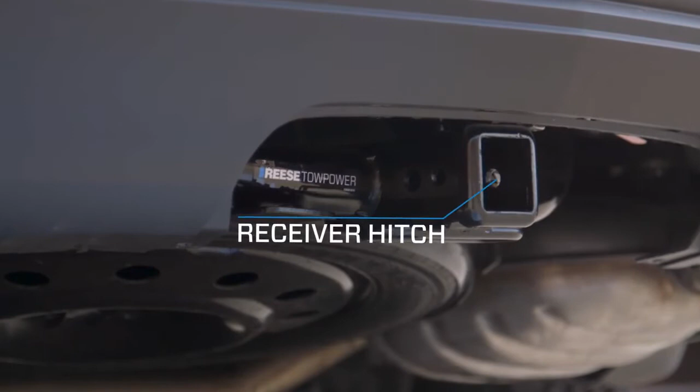The most important piece of equipment when wanting to tow a trailer or cargo product is a vehicle's receiver hitch. A receiver hitch, also known in North America as a trailer hitch, is a device attached to the vehicle's frame for towing that receives removable ball mounts, hitch bike racks, cargo carriers, or other hitch-mounted accessories.

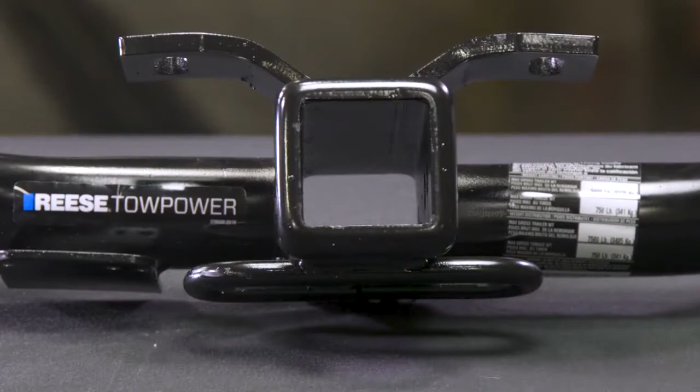They are custom built according to the vehicle manufacturer's model year to ensure perfect fit, appearance, and top towing performance. Today we are going to show you the basic steps to installing a REESE Towpower custom-built trailer hitch.

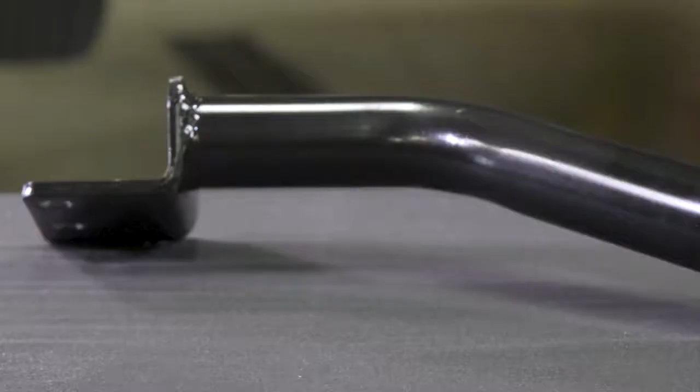Each custom-built REESE Towpower hitch is built for maximum strength and safety, using solid all-welded construction, and features a design that fits around the vehicle's underbody components that often minimizes or eliminates the need for drilling or trimming of bumper fascia.

Before installing, determine what class hitch and weight capacities best fit your towing and cargo carrying needs. For more information or for help selecting the correct hitch for your vehicle and towing setup, visit reesebrands.com.

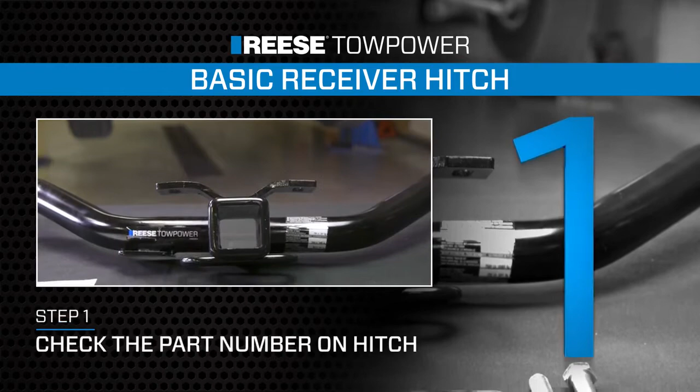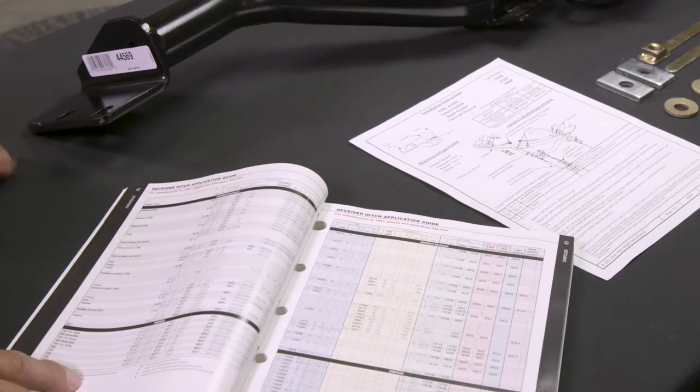Step 1. After determining the correct hitch for the vehicle, the first step is to check the part number on the hitch against the vehicle application guide to ensure you have the correct hitch for the specific vehicle you will be working on. To ensure a quick quality installation, be sure to check all the parts included with the hitch against the parts list and the installation instructions, and gather all necessary tools.

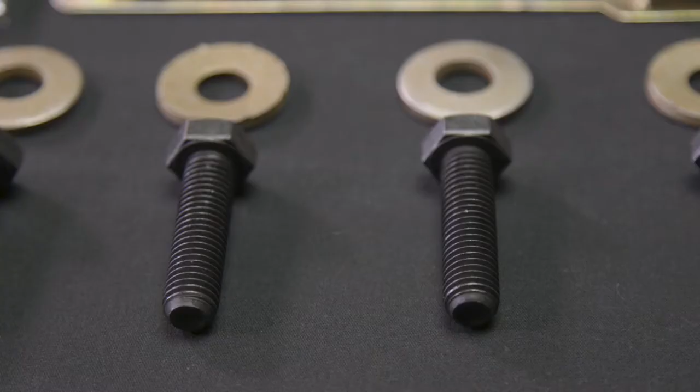As a reminder, use only REESE Towpower provided bolts, nuts, and washers supplied in each kit. When working on any installation, read and review the entire installation instructions. Take proper safety precautions, and always be sure to wear safety glasses.

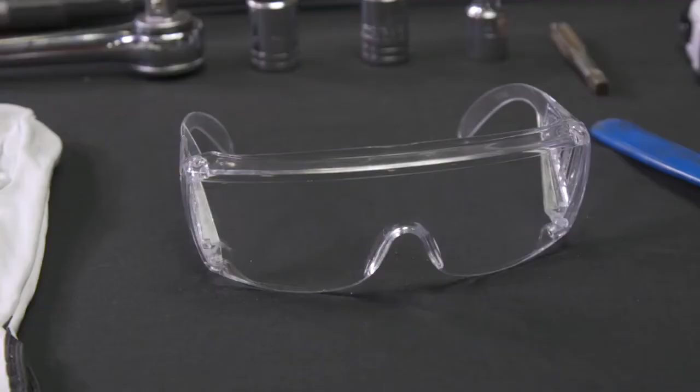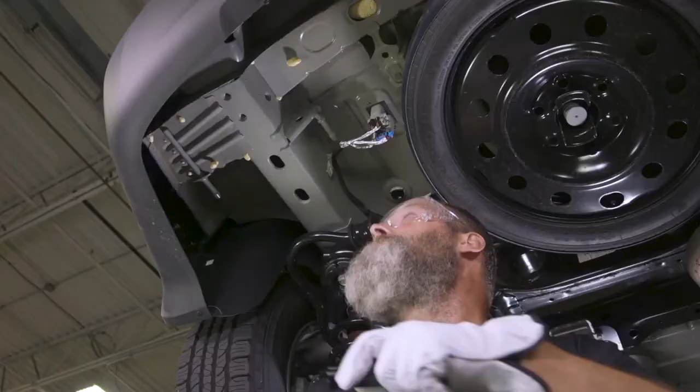Step 2. The next step is to inspect the vehicle. Check the integrity and strength of the vehicle's frame to ensure that it's in suitable condition for the installation. Examine the hitch attachment points to make sure there is no damage or excessive corrosion, which can prevent a secure attachment of the hitch. If there are bumper attachments, make sure the bumper is on tight.

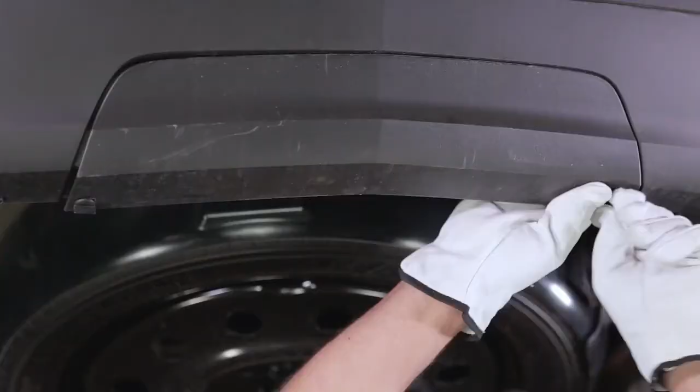Some installations may require that the bumper be temporarily removed, while others may only require the fascia or parts of it to be removed or trimmed. Check the hitch installation instructions for exact location and trim measurements if fascia trimming is required.

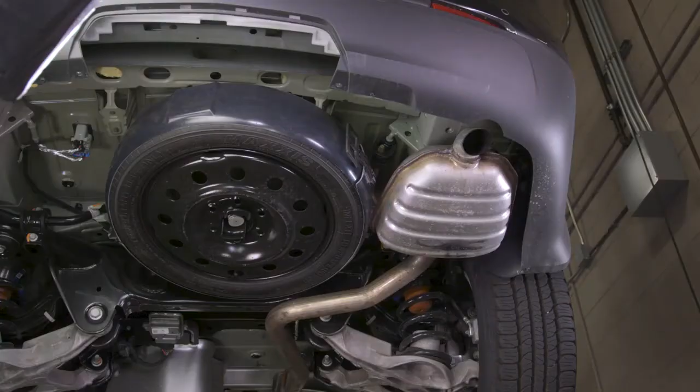If the installation requires that the exhaust be lowered, it is recommended that a spray lubricant or soapy water mixture be used with exhaust pliers to help in removing attaching rubber hangers. Make sure there is enough clearance around the exhaust for the installation of the hitch.

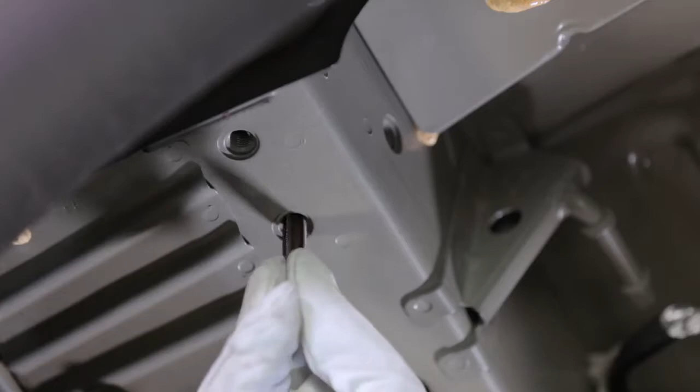Lastly, if the hitch will be installed using factory vehicle weld nuts, inspect the threads for corrosion. If corrosion is present, threads may need to be cleaned with a matching size tap.

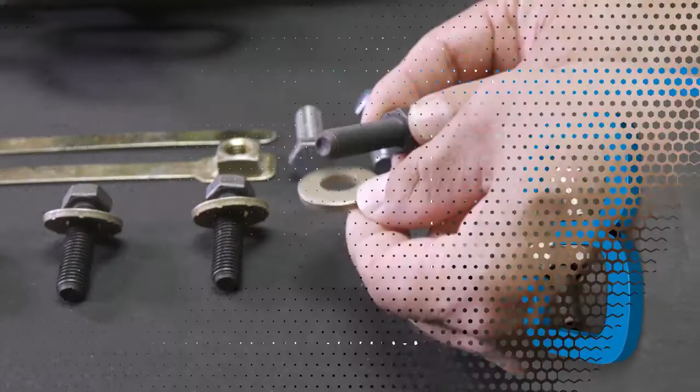Step 3. The third step is to organize the fastening hardware according to the instructions. This will help you determine what fasteners will be used for each attachment point. Some hitch installations will use the vehicle's original hardware to attach the hitch, while others will use the hardware supplied with the hitch. Always refer to your installation instructions for your vehicle-specific installation.

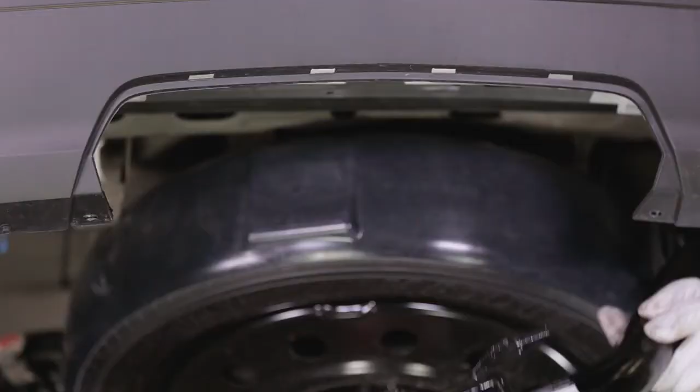Step 4. Next, position the hitch on the vehicle as indicated in the instructions. If necessary, use jack stands or a second person to help hold the hitch in place. Ensure that the hitch is level and verify that all the attachment points align.

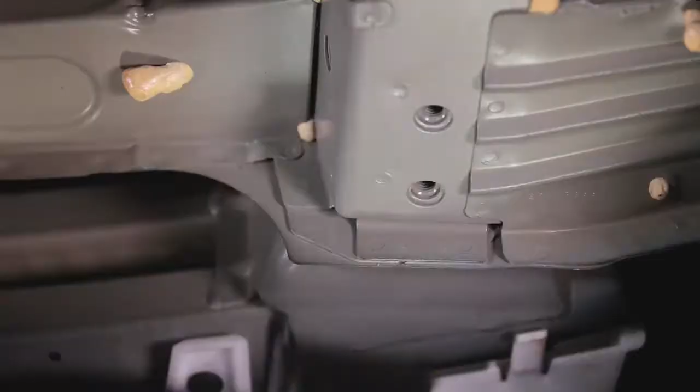Step 5. REESE Towpower makes the installation of hitches easy by using existing attachment holes in the vehicle frame whenever possible, meaning there is often minimal to no drilling required to mount. If drilling into the vehicle frame is required, use the hitch as a template to identify which holes need to be drilled and mark with the center punch. Remember to always verify with the installation instructions for exact drilling locations. Step 6.

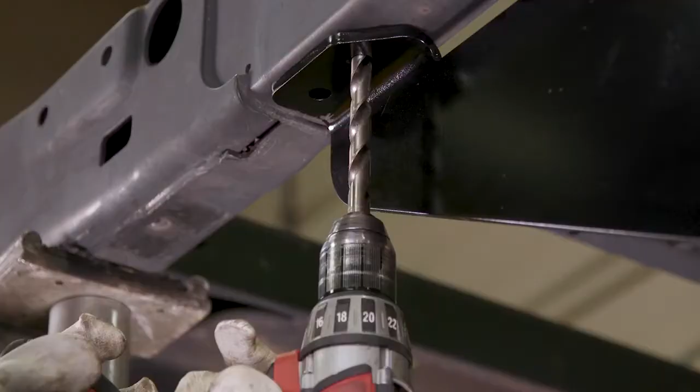For installations that require drilling, check for wires and fuel lines inside the frame sections where you plan to drill, and then drill the attachment holes. Step 7. Once all the attachment holes have been identified or drilled, the next step is to attach the hitch to the vehicle. It's usually quick and easy.

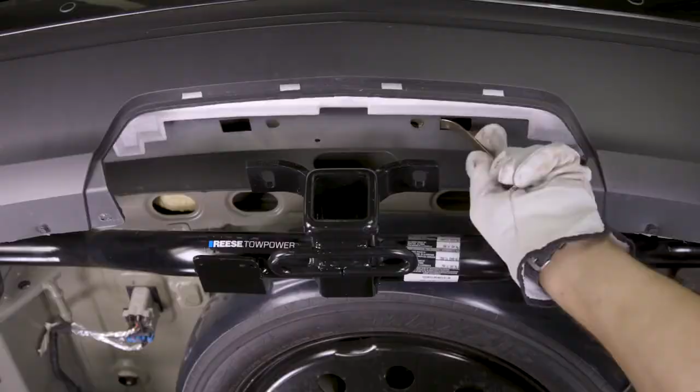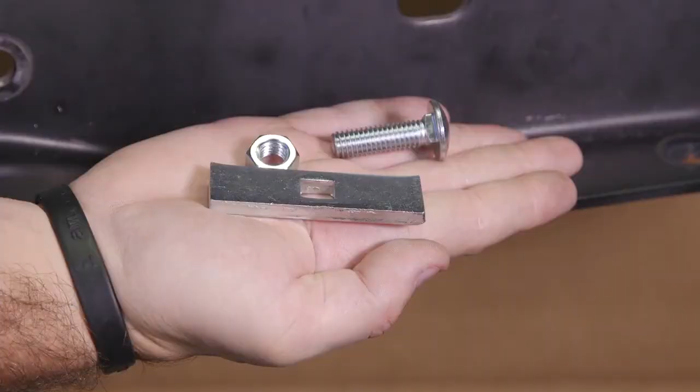However, getting the bolts into position and tightening them can be more challenging on some vehicles due to a boxed-in frame member or bumper. REESE Towpower takes care of this by providing fastening hardware and special spacers for hard-to-reach areas. This hardware can be used in both open and closed frames. For our demonstration purposes, we will be using an open frame for easier viewing. Once inside the frame, the spacer holds the bolt while you tighten the nut.

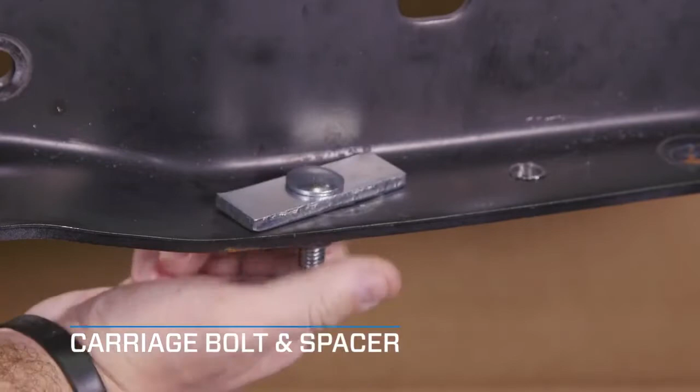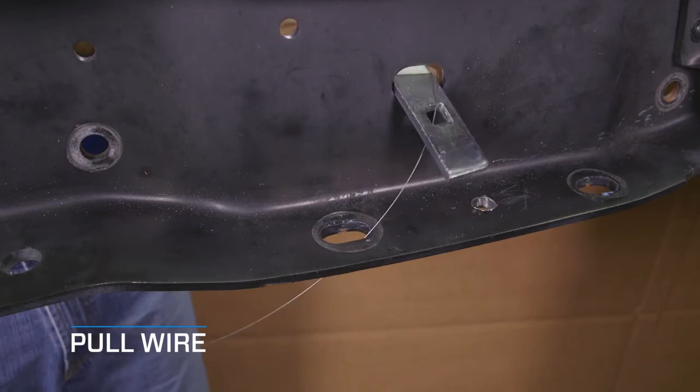When gaining access to an attachment hole becomes a problem, a quick solution is to attach the bolt and spacer to a pull wire, which can be fed through an available access hole, or one that may need to be drilled in the vehicle frame. As the pull wire is pulled through the attachment hole, guide the spacer and bolt into place.

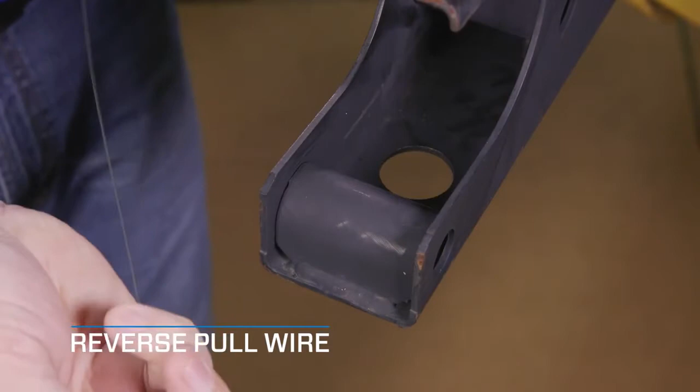The reverse pull wire technique can be used on frames that do not provide or allow drilling for an access hole. Start by attaching the bolt and spacer through the pull wire, then insert both into the attachment hole on the vehicle frame. It is possible that the attachment hole may need to be expanded to allow the bolt and spacer to pass through. Once inside the frame, pull the pull wire to guide the bolt through the attachment hole, while making sure the spacer lays flat across the attachment hole opening inside the frame.

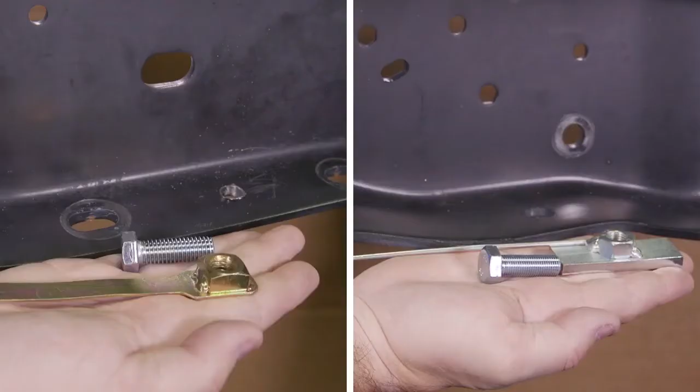For some attachments, handle nuts are provided. When the handle is inserted through the access hole, it positions the nut over the attachment hole, then prevents the nut from turning as the bolt is tightened.

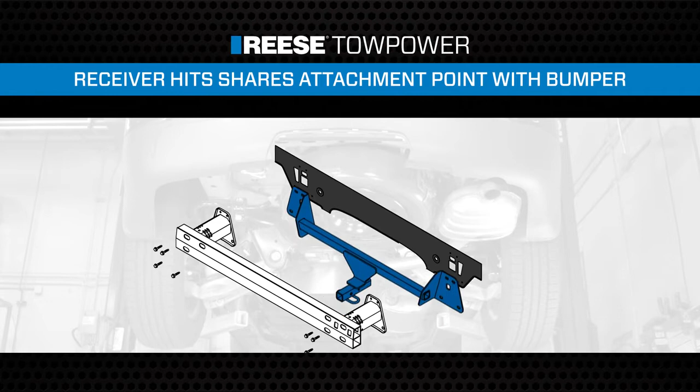Some installations require the hitch to share an attachment point with the bumper of the vehicle. In these situations, loosen the hardware to remove the vehicle's bumper, then install the hitch by aligning its holes to the attachment points in the vehicle's end panel. Once the hitch is placed, reinstall the bumper beam so that it sandwiches the hitch against the bumper end panel, and tighten all hardware.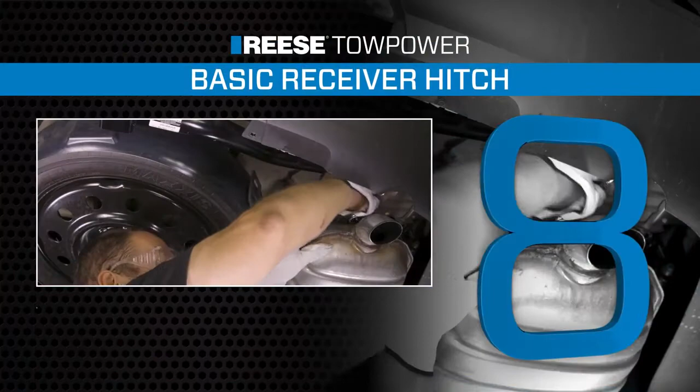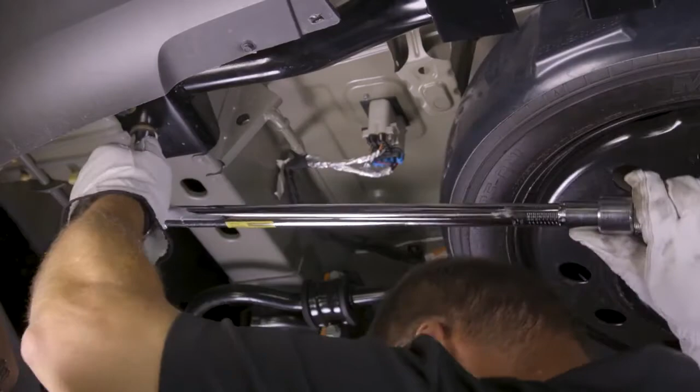Step 8. After the hitch has been placed to the vehicle and all the bolts are in place, the next step is to tighten them evenly with a hand wrench. Once snug, use a torque wrench to tighten all fasteners to the proper torque specification indicated in the installation instructions. Remember, it is important to never use excessive torque or an impact wrench when installing any hitch.

Step 9. The final step is to replace any piece of vehicle that needed to be temporarily removed during the installation. This may include reattaching the exhaust system, reattaching a spare tire, and replacing any bumper fascia. With the hitch in place, you are now able to use a number of hitch attachments and accessories to support your towing needs. As a safety reminder, always tow within the specific weight capacity of your towing setup.

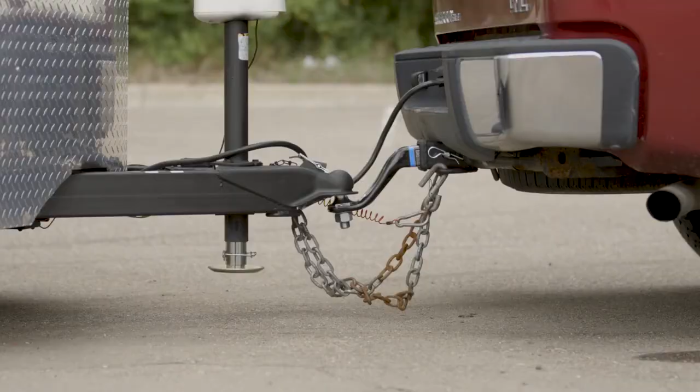Every vehicle has a maximum towing capacity. Neither your vehicle nor your trailer can determine the correct hitch for your towing needs. They work together. In no case should the gross trailer weight or the tongue weight of the trailer ever exceed the tow vehicle or the receiver hitch's maximum towing capacity. Always remember that the component with the lowest load capacity in the towing system determines the highest load you can safely tow.

For any specific hitch installation, be sure to thoroughly read and follow the installation instructions that are included with every REESE Towpower hitch. These instructions will tie the basic steps of your hitch installation with the specific attachment points for your vehicle.